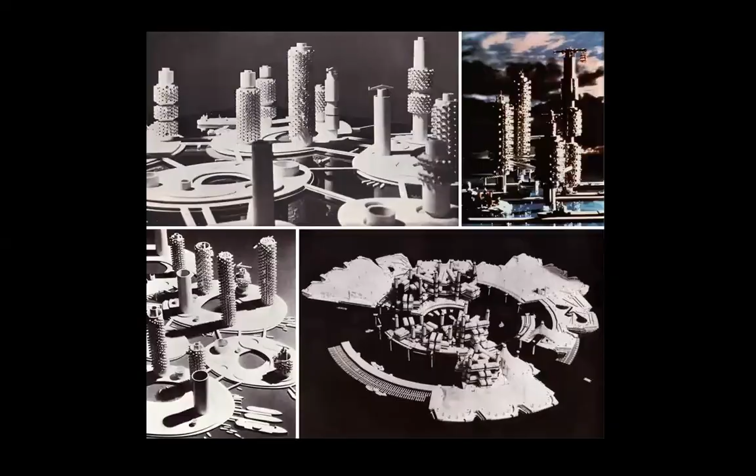Anyway, Metabolist, Kiyonori Kikutake's Marine City, 1968. It was a heroic effort on the part of Japan to transcend the tragic effects of the Second World War. And this country was able in less than 20 years to become one of the most powerful economies in the world, and culturally also immensely important. And in architecture, they still have a vigor that most countries do not have. But at that time, it was this heroic dimension of their effort which impresses me the most. It was truly a revenge that post-war Japan tried to achieve on the very sad, and maybe the word sad is not strong enough, of what happened in the Second World War, if we are to mention just the bombings of Hiroshima and Nagasaki.

So technology, yes, but it's not just technology, because here we are dealing with Japan, and Japan has a very deep, deeply rooted culture in myth, in their systems of faith, and a great connection with nature. And this intermingling between deep affection for nature and an incredible devotion to technology, as sophisticated as possible, created the background on which Japan achieved what it achieved, and it continues to achieve.

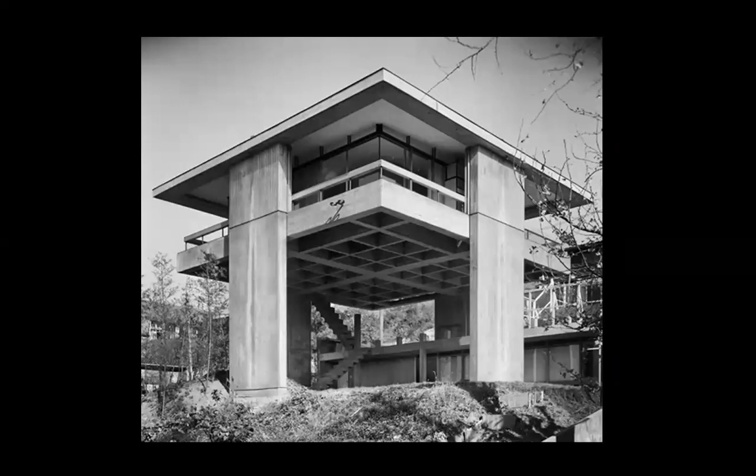The Sky House from 1958, his own house, actually. So 1958. Oh, this was 65 years ago. What can we say? It's a house maybe that doesn't impress us incredibly, but when you consider it was built in 1958, and its very name, a sky house, I wonder what Frank Lloyd Wright would have thought about it, because he thought that the house should emerge from the earth and be attached to the earth. And in this case, it's a sky house. Kiyonori Kikutake.

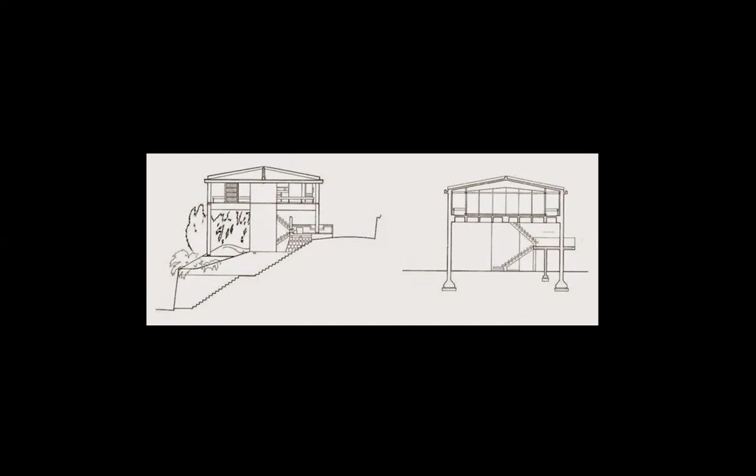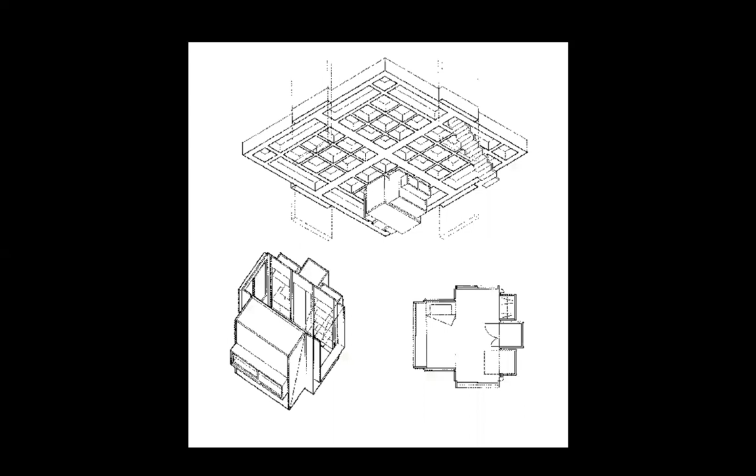But even if it's a sky house, it's in a different sense from, let's say, the anti-gravitational architecture that some architects today advocate. This is not actually anti-gravitational or non-gravitational. In fact, if you look at the section and the side elevation, it is elevated from the Earth, but it's not ignoring gravity. It's coherent, it's clear, it's logical, it's rational, it's not arrogant. It's not an arrogant house that says, I'm going to ignore gravity. No, but for some reason he thought of elevating it above the earth the way he does.

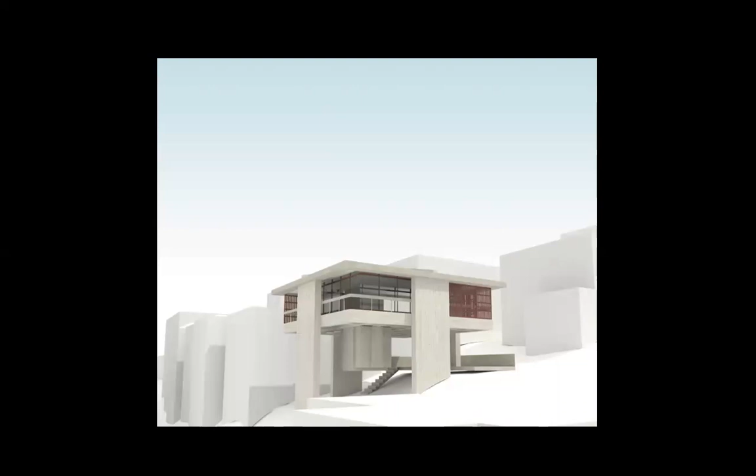You can see his own house because there is a large picture of his utopian, if we are to call them so, utopian studies. The Sky House, Kiyonori Kikutake. Even Rem Koolhaas visited him in this house, and we are going to see some pictures later on with Koolhaas talking to Kikutake inside this house, the Sky House.

From the time of its being built and what this picture depicts, you can see large buildings continue to be built. So now the house is surrounded by massive constructions. A large, unique space.

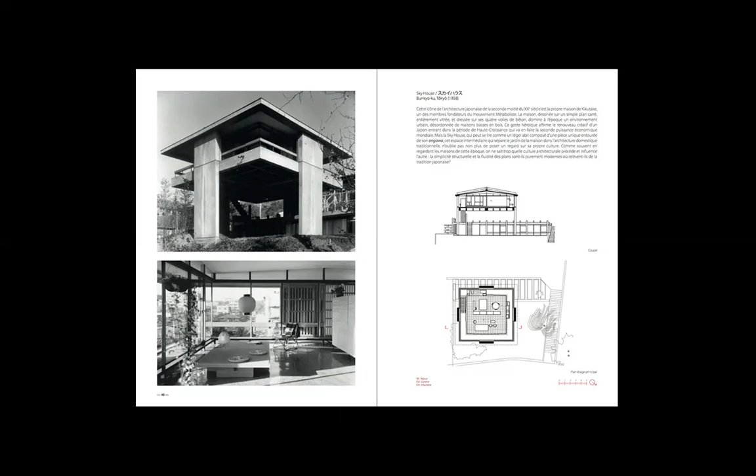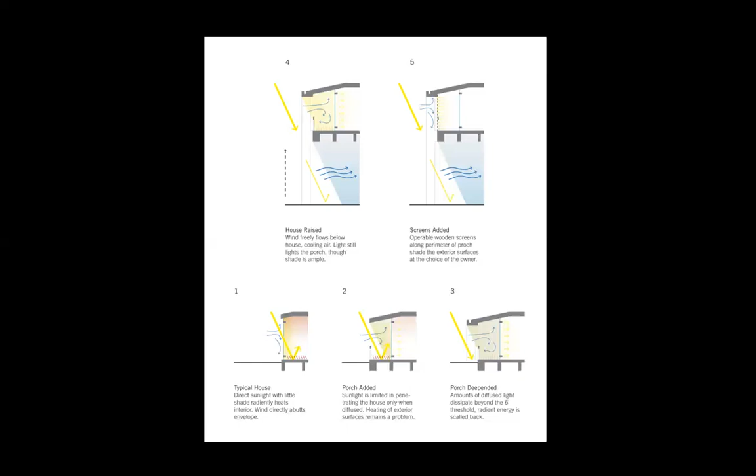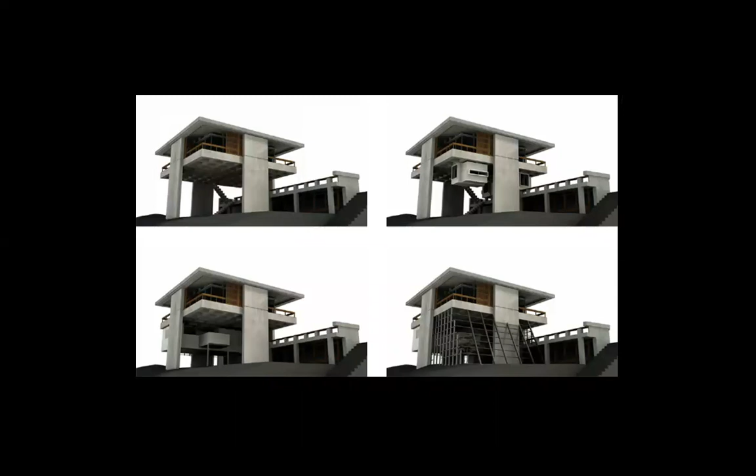Now a temple ossuary, 1965. A very interesting building, actually, with this concrete covering, maybe oppressive somehow, but considering the function of the building, I think it's a very powerful statement. You have this floating cap, this floating covering of concrete that doesn't reach the earth. I wonder what Kikutake thought of when he did this. It is clearly a meditation on the finality of life, on death.

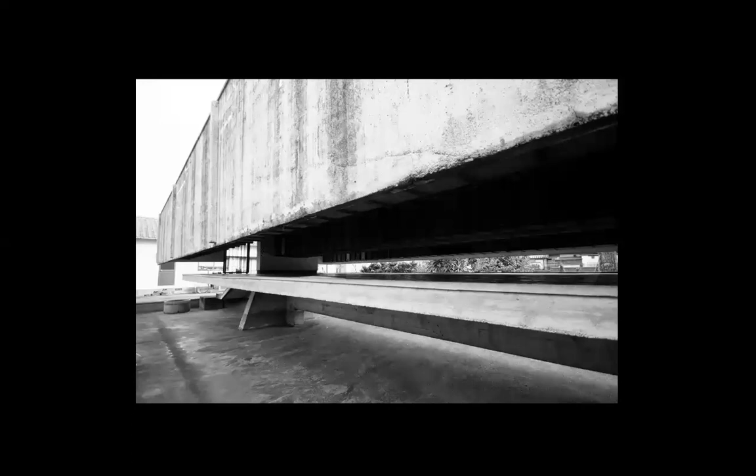This reminds me also a little bit of that memorial by Giuseppe Perugini built in Italy, which also has this heavy slab above where the memorializing graves or gravestones were placed. Interesting comparison between Perugini and Kikutake.

A hotel now, a mundane function after the ossuary, but here we see the influence of, I mean, most people who would look at this image would say this is in Japan. And maybe not just because of the landscape, because of the gardening, but also the building, the silhouette of the building. These architects are very forward-looking, very modern, but also rooted in what we call tradition. And the building is able to evoke somehow the meeting between the two, at least in the previous picture, this one as well.

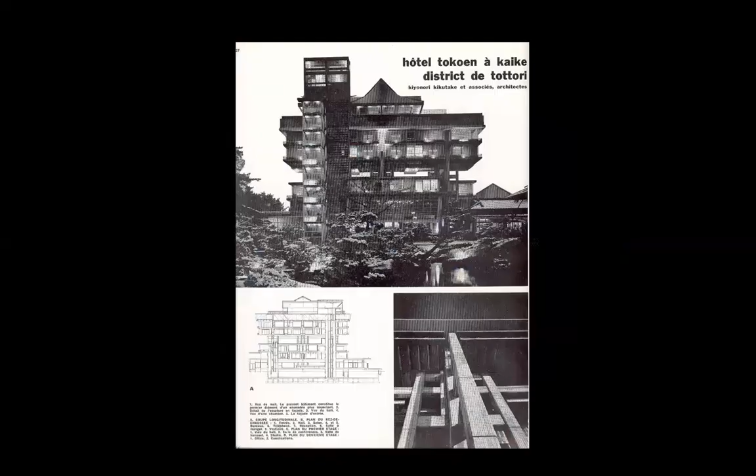Now, they used a lot of concrete, these Japanese architects. I read that at one point, Japan was the country that was using the most concrete in the world. Now it's probably China, but at that time, there wasn't a grave concern with pollution as it is now. Now, I would be more reticent to use so much concrete, but at that time, they tried to escape the ashes of the Second World War, and concrete helped. It also helped to evoke the heroic stance of the Japanese people. So this is a hotel by Kiyonori Kikutake.

And again, the gardening of the Japanese is so delicate and subtle and complex and lyrical. It shows the affection that Japan has for nature, a deeply felt affection. Even when they build with a lot of concrete, they never leave the space around the building a no man's land. They take care of it.

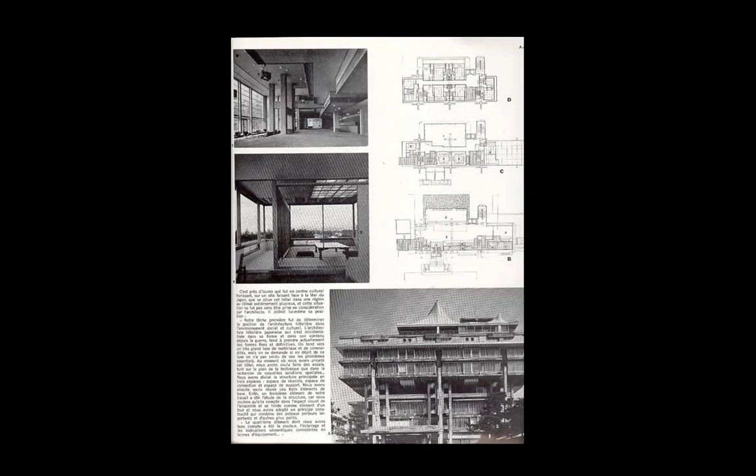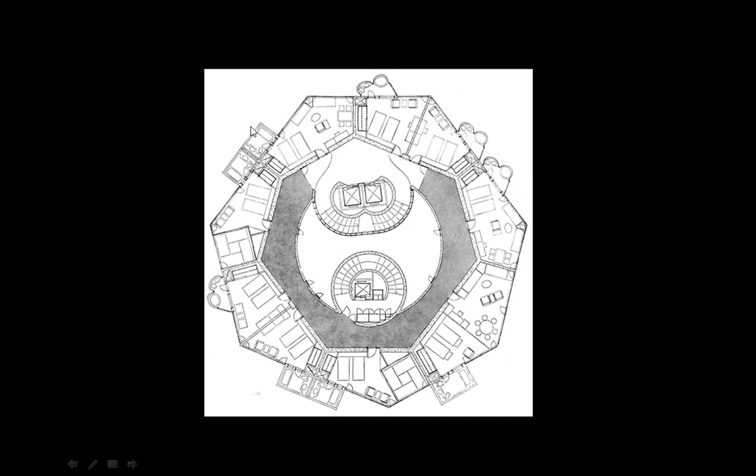Pacific Hotel, another hotel. Interesting how something that is not advised where I am, but the Japanese have no problem doing so, is to place the bathrooms as exterior distinct elements which actually animate the facade, the sides of the building. I mean, the architectural expression of the building would be different if the bathrooms were not externalized in this way.

Practically, the cells of the bathrooms create a dynamic facade, and this is important, very important. And you see the bathrooms are treated differently. They are not all identical. There are like three kinds of bathrooms here: two together, one, then here with a different shape.

This was the future. I don't know if he said it. I included it in the presentation which I prepared a few years ago, or I found these words in an article about him. But it is an intriguing, short statement. This was the future. We can talk about it, maybe on a special occasion with this very title.

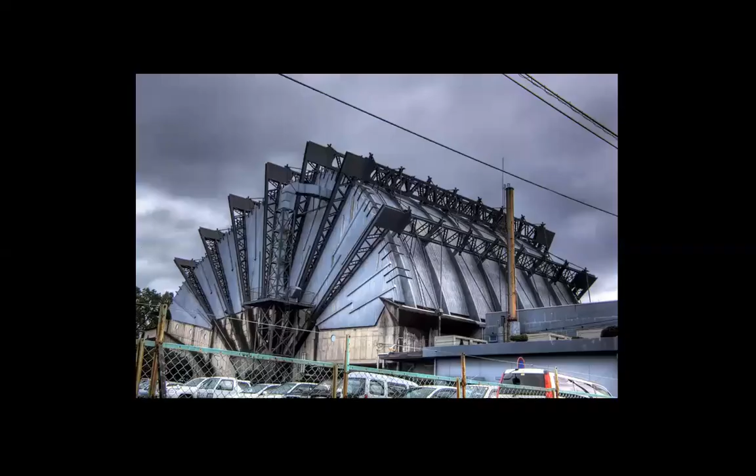This was the future. A civic center, 1966, a very spectacular building, very unexpected for a civic center. Look at this. You know, it's a mechanism or a mechanical organism, structurally intriguing and provocative. If you look at it, you would not say it's a civic center. You would say maybe it's either an industrial building or a gymnasium of some sort. Kiyonori Kikutake.

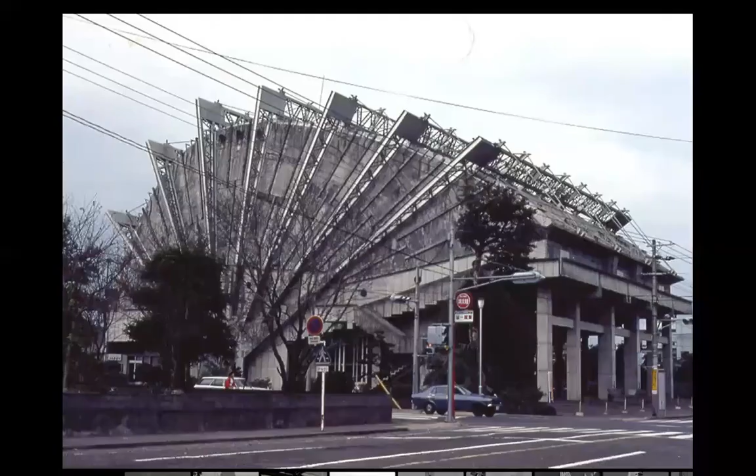This city hall is still very provocative, aesthetically speaking. You are tempted to think that it's like an accordion, a harmonica, that you can squeeze those parts that are diagonal, but it is not so.

It's clear that the metabolic processes of nature are here reinterpreted architecturally, and it's about the bio in architecture. It's a bioarchitecture, abstracted as it should be.

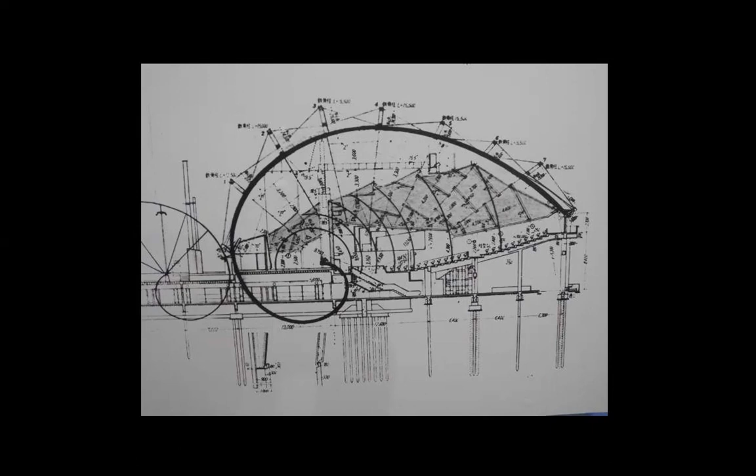Expo Tower, Osaka, 1972. A remarkable tower that he built. But here it says 1972. It should be 1970. He worked together with Kenzo Tange, Arata Isozaki, and other architects, and they created a very spectacular Osaka World Exhibition. Here again, we see technology and geometry and the forces of nature contributing to a certain vision that is associated with what we call metabolism.

Osaka will have again a world exhibition in 2025. Apparently, they are very good at this sort of thing. They even had one, I forgot exactly in what year, around the 1990s, dedicated to gardens. Apparently, a very successful world exhibition as well. This tower is by Kiyonori Kikutake.

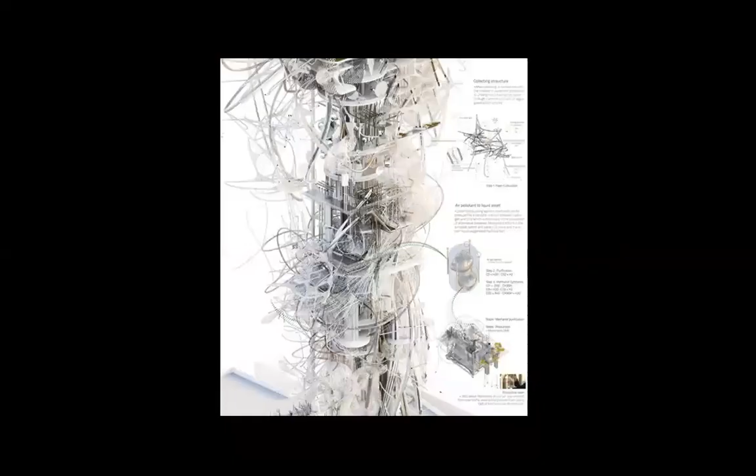I mean, here we arrived, and I find these images very, very provocative. The process would involve extracting the carbon from petrol fumes and using it to produce sustainable biofuel. The project is about a new infrastructure gathering resources from pollutants in the city atmosphere, which could be another valuable commodity in the age of depleting resources, says Chang Yo Li. So visionary projects are still being made, and it's good that it is so. It looks different in many ways from the tower by Kikutake, but somehow I think it expresses our time.

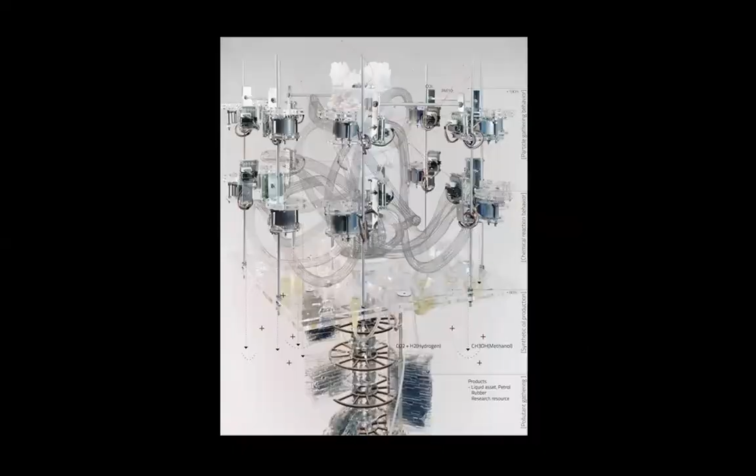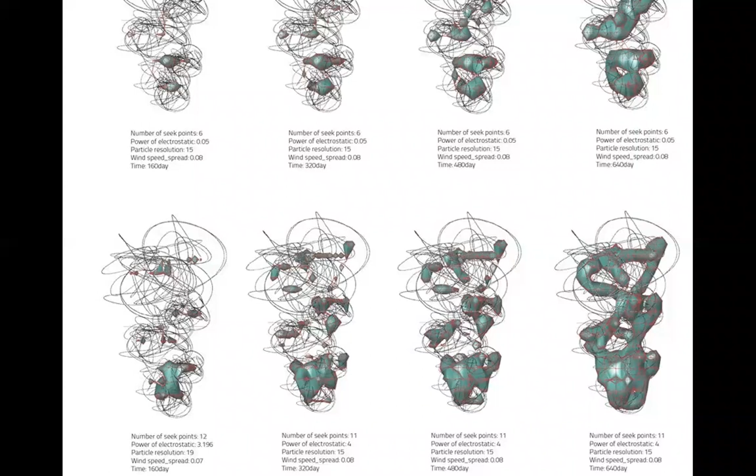Referencing a quote from architect Buckminster Fuller, Lee says, pollution is nothing but the resources we are not harvesting. We allow them to disperse because we've been ignorant of their value. He adds, pollution could be another economy. Well, wishful thinking. Anyway, he worked hard for this. It's a diploma project from the architecture program at the Royal College of Art in London. And he was one of the two winners of the Sheppard Robson Student Prize for Architecture at the Royal Academy of Arts Summer Exhibition. And here are some other images of his project.

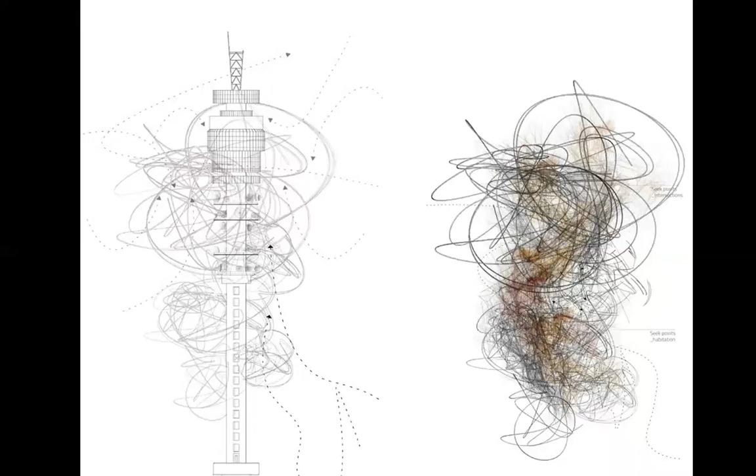He also doesn't say no to chaos and architectural entanglements. As such, I think he is very up to date. I mean, rationalism is not sustainable any longer. Reason is necessary, but not rationalism in the narrow sense of the word.

Between 1968 and 1983, Kikutake produced numerous projects for floating cities with evocative names such as Marine City and Ocean City. In 1975, he finally got to build a real one. Aquapolis was a 10,000 square meter floating city, a crossover between an aircraft carrier and an oil rig. It formed the centerpiece of the Okinawa Ocean Expo. Aquapolis, built by Kikutake in 1975. Here it is.

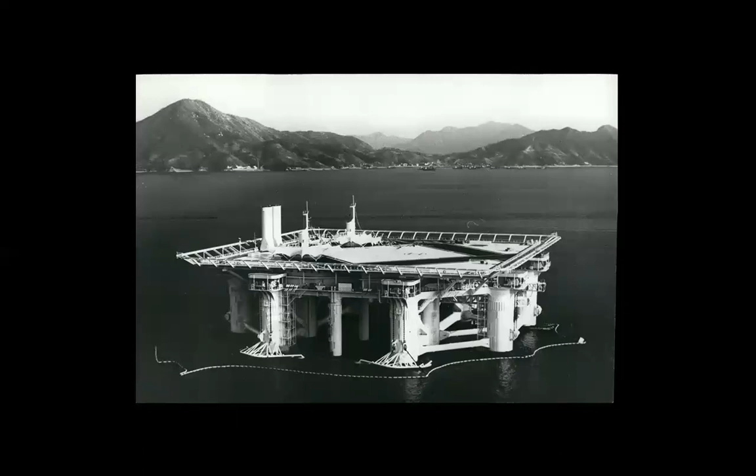I'm not sure this is what our oceans and seas need, but at that time there was more optimism relating to the activity of human beings on this earth than today. Although today there are many projects, some built in the same spirit, and we are going to see one a little bit later, built by Diller and Scofidio, inspired, I'm sure, by this project, and also by the pavilion that Pepsi Cola built in Osaka.

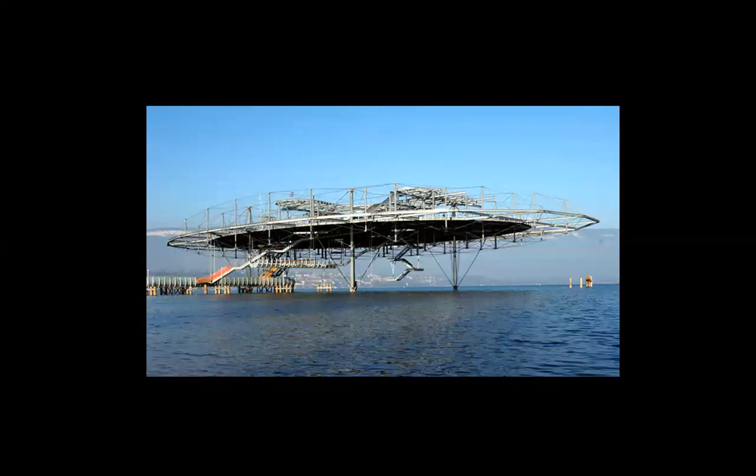Unfortunately, I'm not so sure the idea of building a blur building in Switzerland by Diller and Scofidio was very original, but it looks striking. So this is what Diller and Scofidio did. You saw what Kikutake did, no? And then we see Diller and Scofidio here in Switzerland on a lake. There's a lot to say about this.

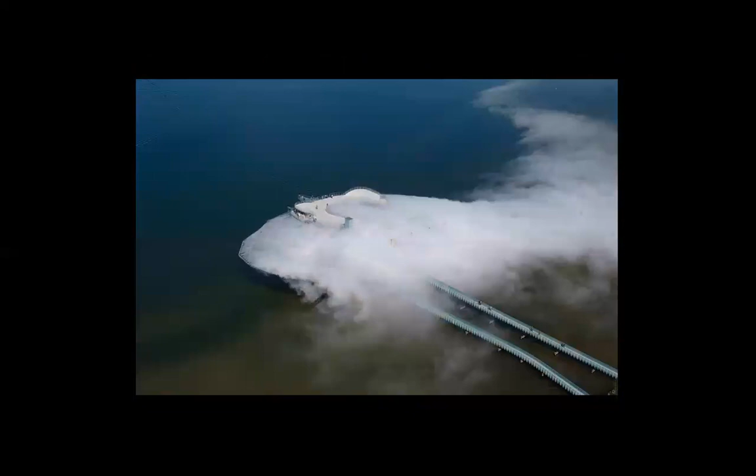Which is a dignified architecture, robust yet sensitive, asserting yet modest. This is what sustains these Japanese architects, even when they are very forward-looking and extremely dedicated to the highest technology. They have the support. They are grounded in that cultural and spiritual past, which they never ignored. And this gives them legitimacy and force. They are grounded.

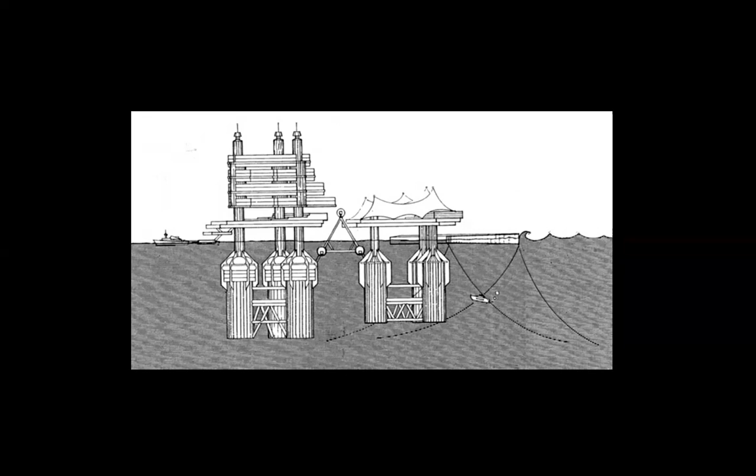Marine City, Hawaii, 1971 — another attempt to extend humankind on water. Utopian projects, if we are to call them so, but utopia could be realized, with some corrections maybe.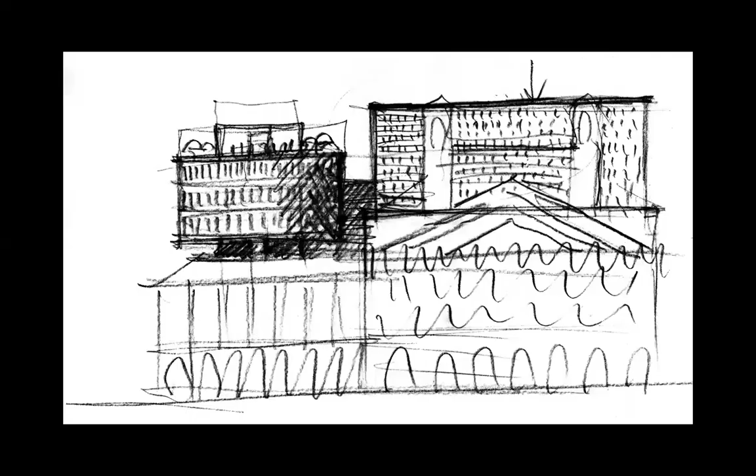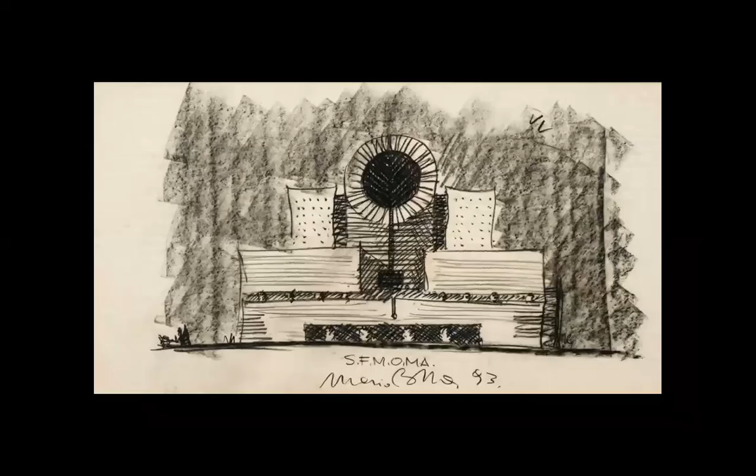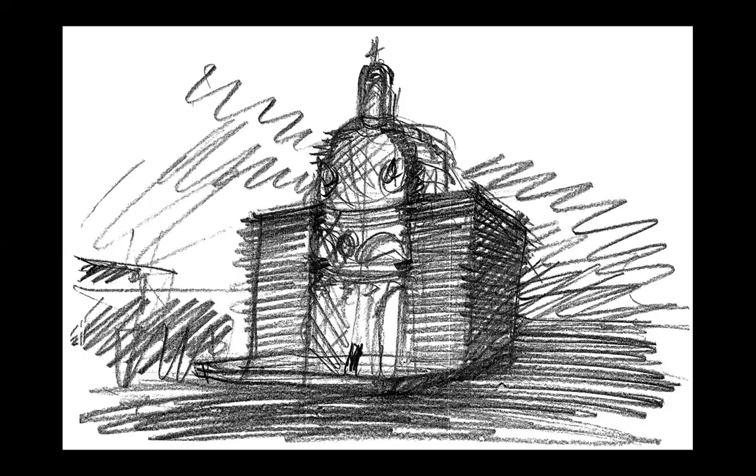Some drawings — in the hurry to prepare this material, I didn't include his early drawings. I think he was drawing better when he was young than when he became older, maybe because he became tired of his own success. The drawings he did later, like this one, are rather quick sketches, and I personally don't find them very attractive graphically, but that's how I start a presentation, by showing also the drawings of the architect I am talking about. I included these drawings, but these are drawings done later in his life. When he was young, he was influenced a lot by Louis Kahn.

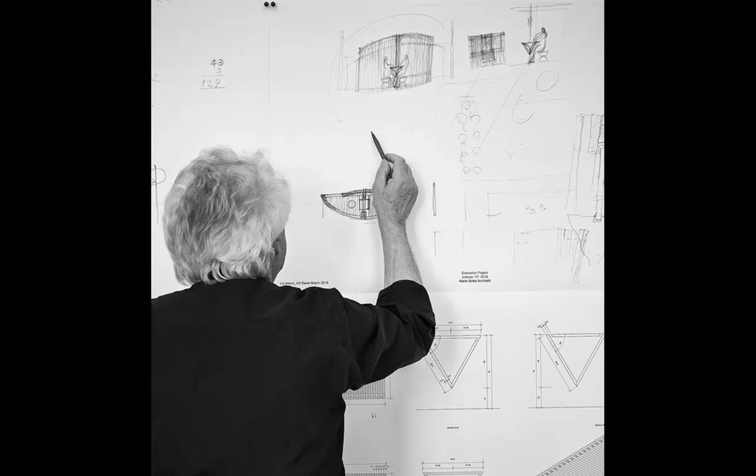Here he is drawing on some paper on the wall. He loves to draw and draws manually, although in Mendrisio, the school founded by him, they study digital technologies very early on, from the first year — and it's not optional, you have to do it.

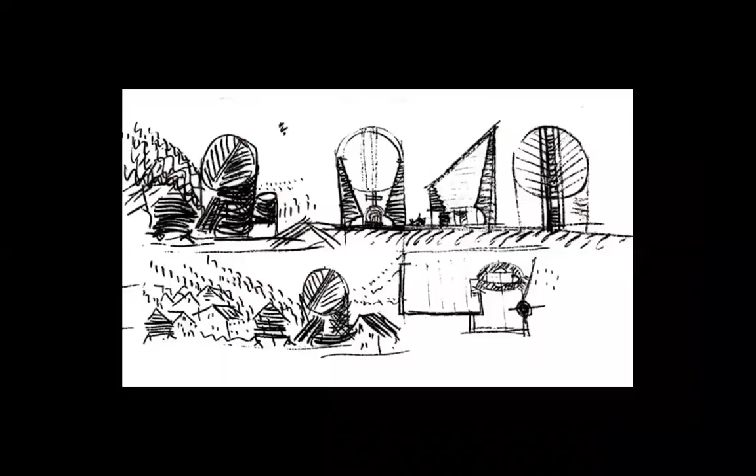Here he is drawing a chair that he actually built. Unfortunately, in this presentation, I do not show his furniture designs and other sketches. We are going to see this building later on.

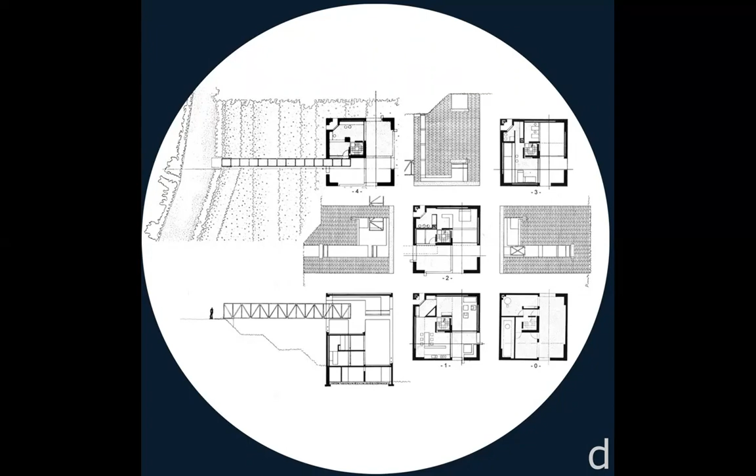The landscape is magnificent. The architecture is very clearly defined, but because of the large openings in the walls it connects with the outside. It could have been very alien in the landscape, but because of those large erosions, if I am to call them so, the prism is receiving and giving, is participating in what we call the environment. Also the unusual aspect that you enter the house at the top, not at the bottom. This also creates something distinct.

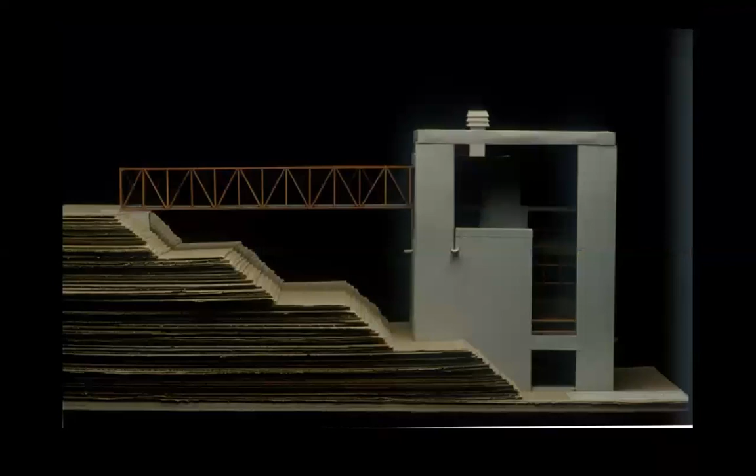Some echoes on the right, a little bit from Carlo Scarpa, his professor or tutor at the University of Architecture in Venice.

At that time, he had a fresh vision, and his buildings were expressing this vision appropriately. But later on, I think sometimes he became a little bit the prisoner of his own maniera.

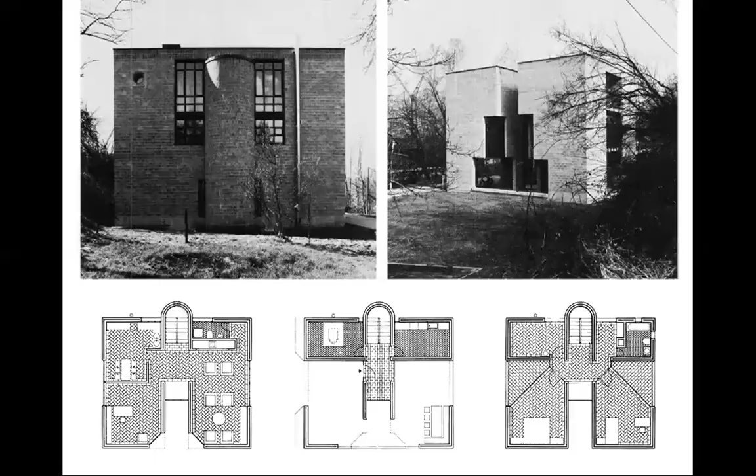Sampietro House, 1979. Very often he has a solid which he cuts in half, so you can see the two parts that were disassociated, like here. It's a rift between two parts, but there is also the whole, which is the cube, almost the cube. This became a signature, a trademark for Mario Botta, a little bit tiring at times.

He was very influenced by Louis Kahn, but I think Louis Kahn is a superior architect, although Mario Botta has some remarkable achievements, and we are going to see some of them.

I would think what differentiates Louis Kahn from Mario Botta is that, well, on one hand one was the teacher and the other the student, so to speak, but more than this, I think Mario Botta, despite the fact that he is very interested in what is called the sacred, does have a rather high level of the mundane in his work.

This could be problematic sometimes, but he did build some very convincing structures for religion, for spirit, for the sacred. Maybe he even thought of doing his villas somehow not necessarily inspired by Villa Rotonda of Palladio, although he has one himself called Rotonda, and we are going to see it. But the idealism of that kind of architecture seems to animate him. Not too many architects at that time, and even today, or especially today, have a similar idealism.

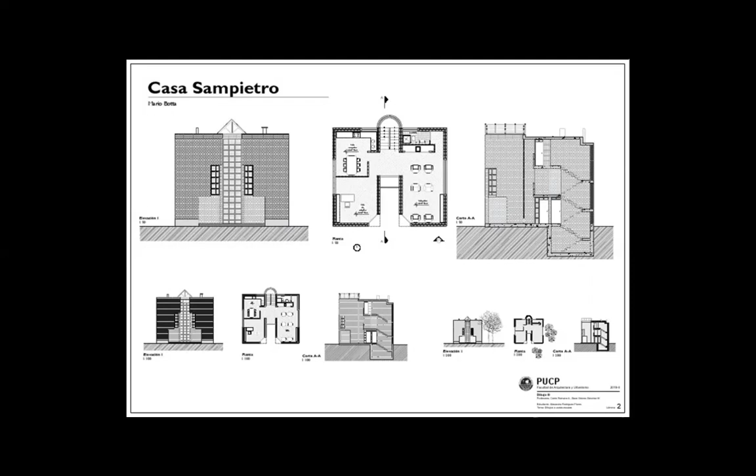Anyway, as compared to the other buildings that surround this building by Mario Botta, his building does have an architect. The others, we are not sure. But in this case, we say yes, it's the will of the architect. Maybe sometimes the will of the architect is too obvious. We see on the elevation, upper left, and even here, maybe because they became so well known, these buildings by him don't surprise any longer. They are a little bit facile. They became icons, and they don't generate, in my opinion, great surprise any longer. This is how the building looks from the back.

Sorry again for the small resolution picture. And now Casa Rotonda, 1982. That was the year when the postmodern Venice Biennale took place under the directorship of Paolo Portoghesi, but still the architecture of Mario Botta at that time was intriguing, was powerful, was iconic.

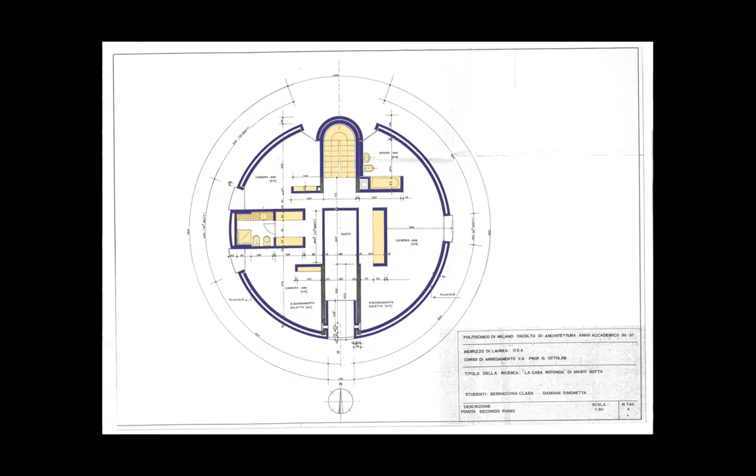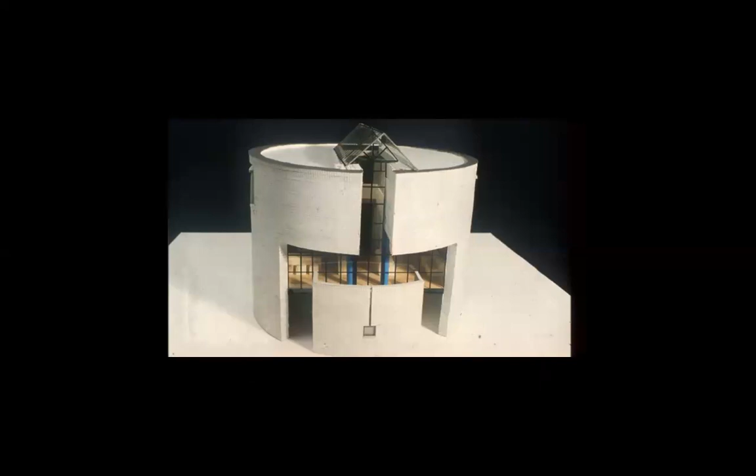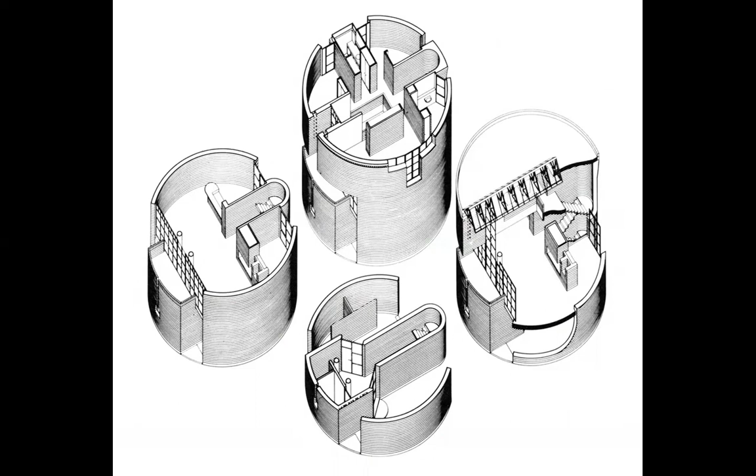But Mario Botta never left the solidity of what he believed in for the seductions, sometimes violently so, or sometimes mimicked in a seductive way, of deconstruction. And nor was his postmodernism highly nostalgic, in the sense that he didn't borrow stylistic elements from history. So I wouldn't say that his buildings are historicist. They are not.

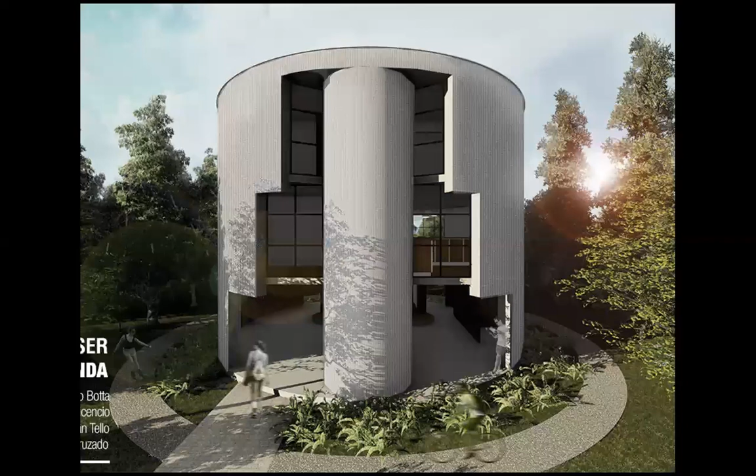But there is a connection with postmodernism, and that's why there are articles about him, where some of his buildings are placed within the context of what we call postmodernism. It's not that postmodernism of nostalgia that animated many disenchanted souls at the end of the 20th century. No, he still believed in an abstraction, in a strong geometry, and he didn't employ borrowed columns from I don't know what era and so on.

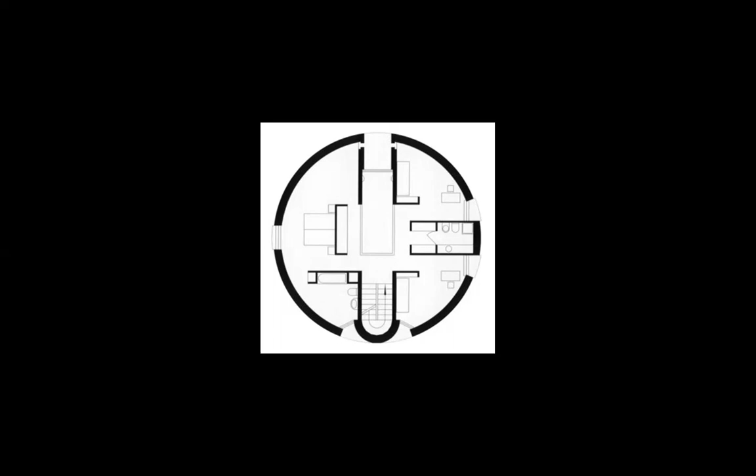In my opinion, it's a little bit regrettable that the staircase externalizes itself in this way, rather convenient and a little bit predictably. It could have done more, but I think, considering the purity of the cylinder.

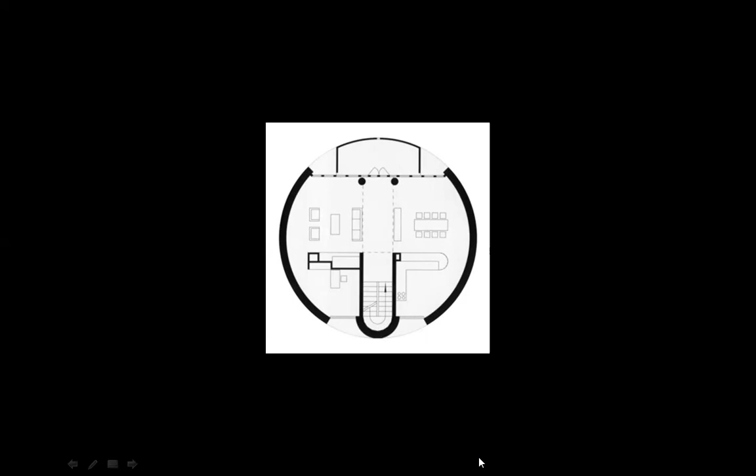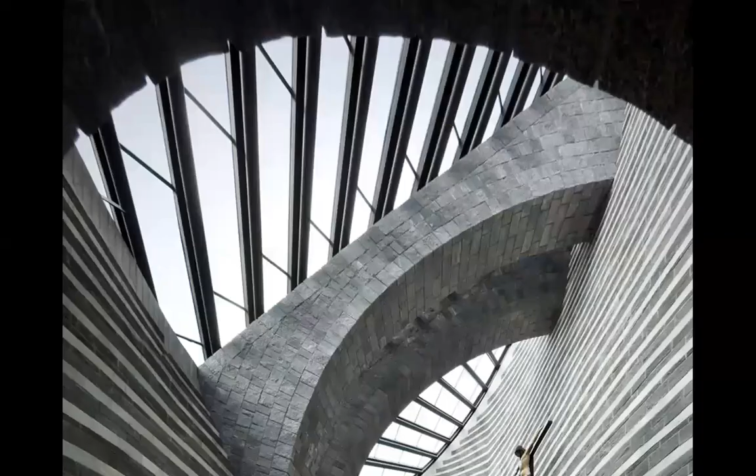The church San Giovanni Battista Mogno in Switzerland, 1996. We saw some drawings of it. Now we see the building. There is heavy masonry here. Some people would say that it's too heavy for our time, but who knows? Who knows? Maybe not. But we remember those words between matter and memory. We see both matter and memory. We also see ornament. He's not afraid to bring sensitivity to his masonry walls through graphic means which are ornamental in nature.

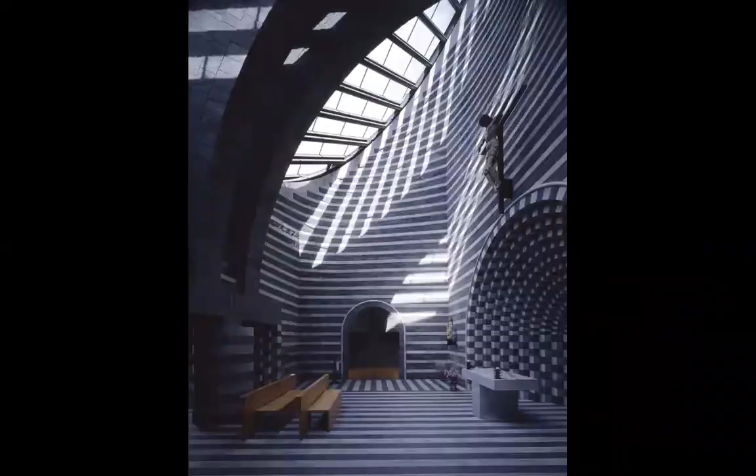He obviously believes in architecture in a way in which maybe not too many of us still do. We are going to see a number of churches built by him because he did build a lot in the field of what he calls the sacred. I would be hesitant a little bit to use this word sacred because, like the word love, if it's too employed, it becomes weaker actually. But to replace it with what? It's a question.

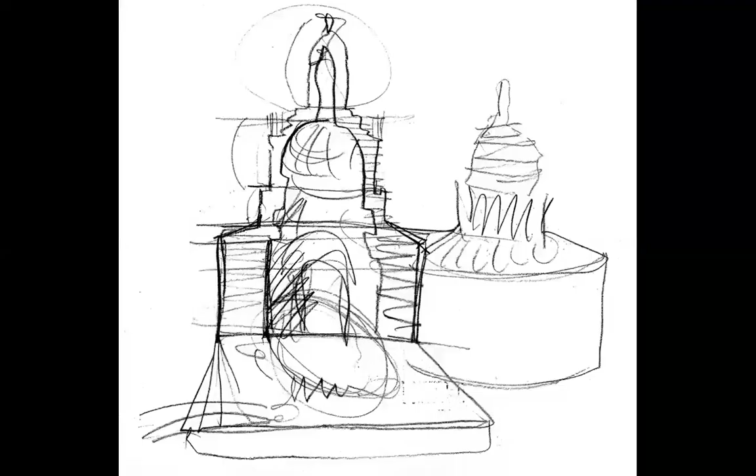But the drawings are probably expressing very intimately the time we are in. The idealism or ideality of Borromini, not to mention Bernini, and that time, you know, are probably difficult to sustain these days. That's why very important architects today draw almost disenchanted drawings, like these sketches by Mario Botta. I wonder what he felt, what he thought when he made these nervous sketches.

This is not how Borromini drew. This is the 20th century or the 21st century, the 20th century. But this was the idea, to cut in half, you know, the interior of the building by Borromini in Rome.

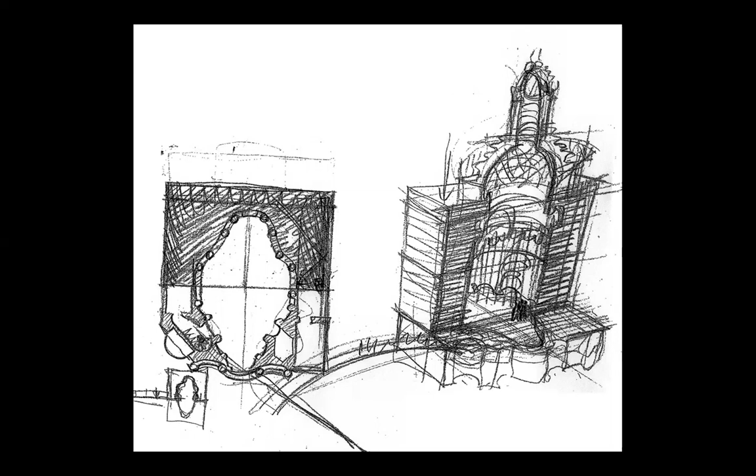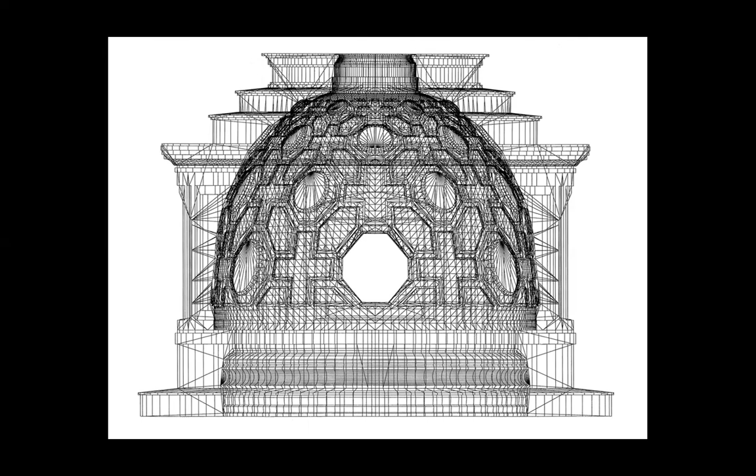And with the help of digital technology, this became feasible, and it was done. And I salute it as a good work. I mean, how else to express your homage towards Borromini? You couldn't compete with him, but in an original way, Mario Botta succeeded in showing both affection and distance somehow.

And in a way, it's a meditation on life itself, because we are all born to die, and we are all accompanied by a shadow, which at the end becomes vertical while we become horizontal. I don't know if I expressed properly what I wanted to say.

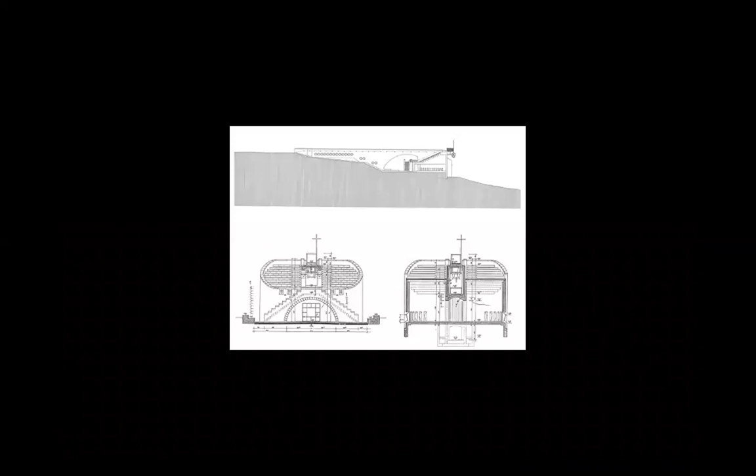I'm unhappy with these images, but as I said, I had no choice. The interior is rather surprising and very courageous, I would say, with its level of abstraction and the presence of blackness and wood. It's an interior which doesn't leave you indifferent.

Nor being on this terrace, I think, leaves you indifferent. It's impossible contemplating those mountains and the sky. Is it a Zarathustrian statement? I don't know. I mean, it is very ample. That stone brought there, it's not really an ecological building. It's not a building which asserts eco values. It's assertive still of man, but a man who cannot live without something higher than him.

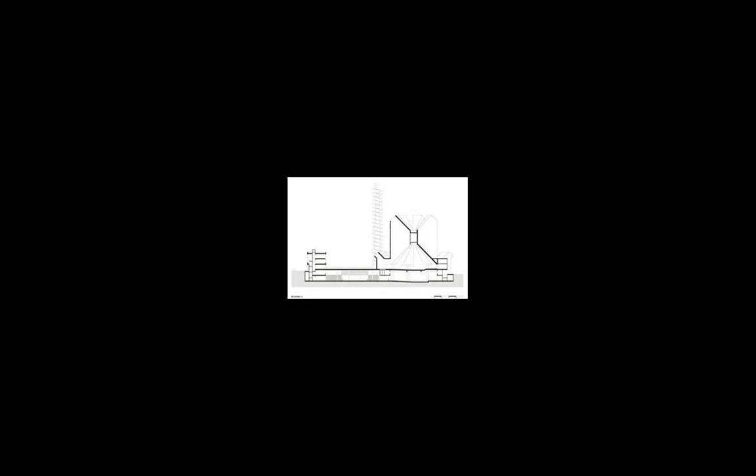Now, a synagogue and the Jewish Heritage Center, Cymbalista Synagogue in Tel Aviv. The Cymbalista Synagogue and Jewish Heritage Center is a cultural center and the main synagogue of Tel Aviv University. It was designed in 1996 by Mario Botta and constructed from 1997 to 1998. It has a few echoes, not towards the outside, but if we see the section of the unbuilt synagogue by Louis Kahn in Jerusalem, and there are other echoes from Louis Kahn here.

Again, I'm exasperated by these drawings, and I couldn't solve this problem. Particularly, this section makes me think of the synagogue project done by Louis Kahn for Jerusalem, which was not built, unfortunately. I think one day someone has to build that building, just as some people built Saint-Pierre de Firminy Vert by Le Corbusier after he died.

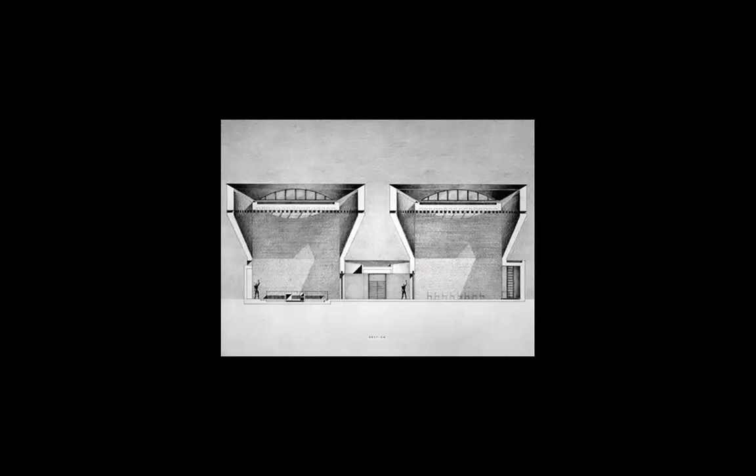Now, what is that silhouette? I don't know if he did this drawing or his office, but I wonder why he used the paradigmatic Le Corbusier's little man, little but muscular, in these sections. I'm not sure it was needed. Anyway, maybe they are not his drawings or his office's.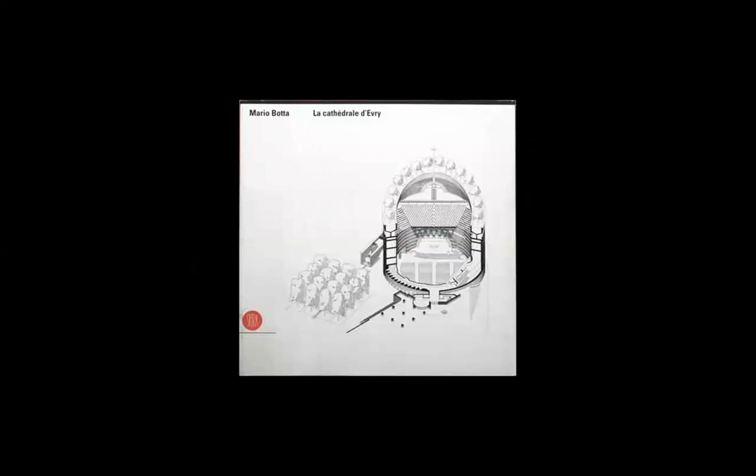Évry Cathedral in France, a large building, yes, it's a cathedral with an unusual crown of trees at the top. Here again, we see some echoes of a staircase done by Louis Kahn for the Yale Art Gallery, but at a much larger scale. Hard to see this. Sorry, I'm referring to this, but it looks like it's not a circle. It's an ellipse, but maybe it is a circle. I couldn't understand from this drawing.

But echoes from Louis Kahn are all very obvious. But less obvious is what we see outside. And yes, this, I don't know, at first I didn't like it, this crown of trees, but I don't know. I still have to think about it. It's an architecture that I think in many of his works, even those dedicated to what we call the sacred, Mario Botta couldn't quite get rid of some touches of the mundane somehow. I have the feeling.

Or maybe I should say it's about the graphic aspect of his architecture, which is present. He's working with tectonics, he's convincing using bricks and stones, but sometimes he's not sufficiently surprising. For example, I think that Sigurd Lewerentz in Sweden is more surprising with a much more modest building where he employs bricks in very poetical ways.

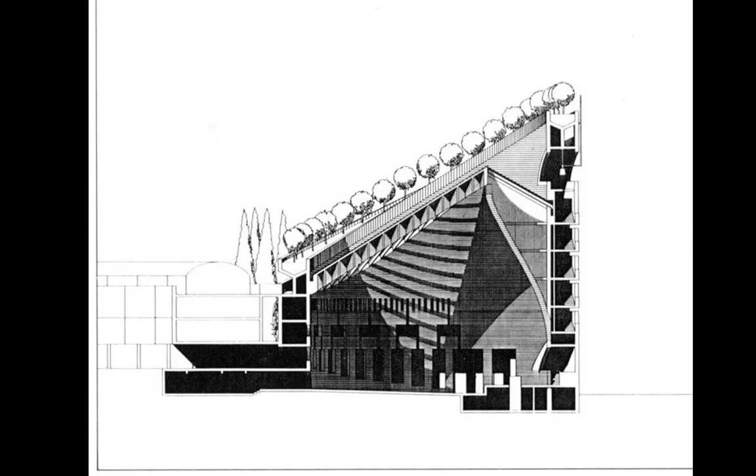Again, we see the employment of brick, not neglecting ornament. And now the Watari, a museum in Japan. I wanted to include also a building that is neither a house nor a church, and it is in Japan. It's a museum of contemporary art in Tokyo. And I think somehow he was able to remain himself and also evoke somehow Japan.

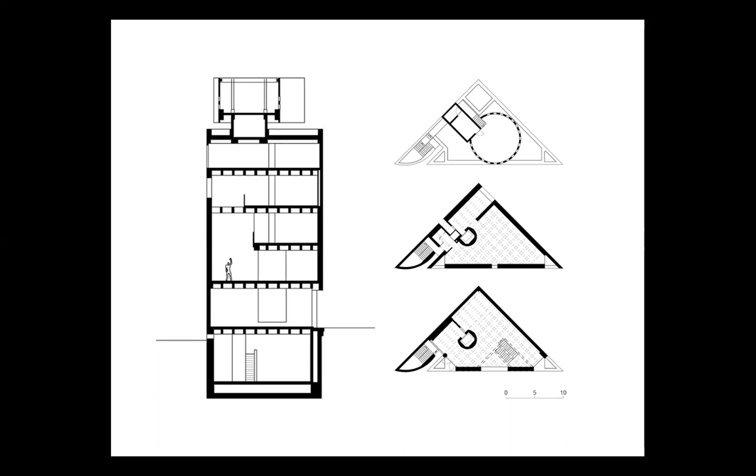I think he did a good job at avoiding using his paradigmatic brick aesthetics, red brick. And here we have, it's still a Mario Botta building, but adapted to the Japanese context, to Tokyo. And yes, this facade is a little bit predictable because we already talked about it. Here you have the rift between the left side and the right side. It's a trademark, or it's a signature element in his architecture. But somehow he honored the context, the Japanese context, Tokyo, appropriately.

Now, maybe that banner there looks a little bit strange, but maybe that's exactly what the building needed in order to escape maybe the excesses of something too solemn, maybe.

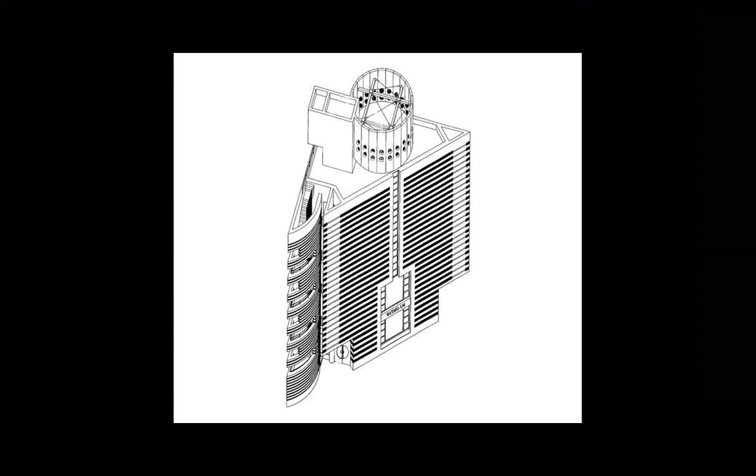Okay, and now a work in Austria, which puzzled me, because for someone who is truly concerned about spirituality and about what he himself calls often the sacred, this building is too acrobatic and, in a way, simplistically acrobatic. And I don't think spirit truly needs something like this. Like if I compare this with a very modest chapel that Lina Bo Bardi built in Brazil, here I see, yes, an acrobatic architecture that is a little bit too showy, in my opinion.

I mean, does spirit need this rotation of the cube? This exhibitionism, this extravagant gesture? I don't think it does. But that's what he thought of doing, and that's what he did. I personally do not think spirit needs something like this.

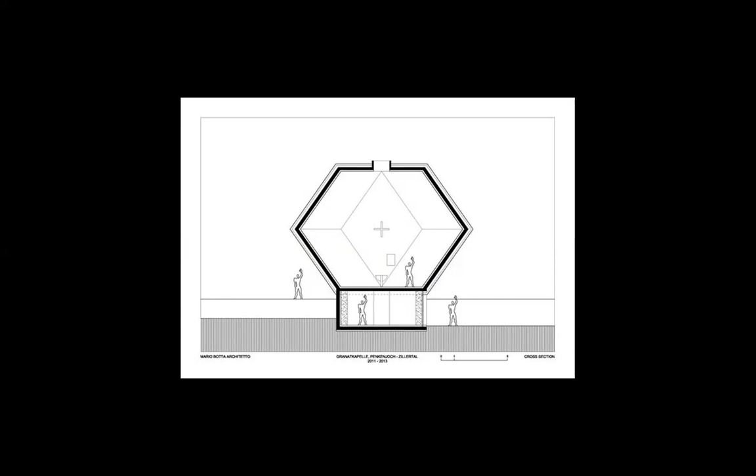Anyway, he's still very capable of creating these geometries; with simple means he is able to create sometimes unexpected results. The drawing also shows some anxiety, I would say. If I am to psychoanalyze the drawing, where the stairs are, I see some nervousness there.

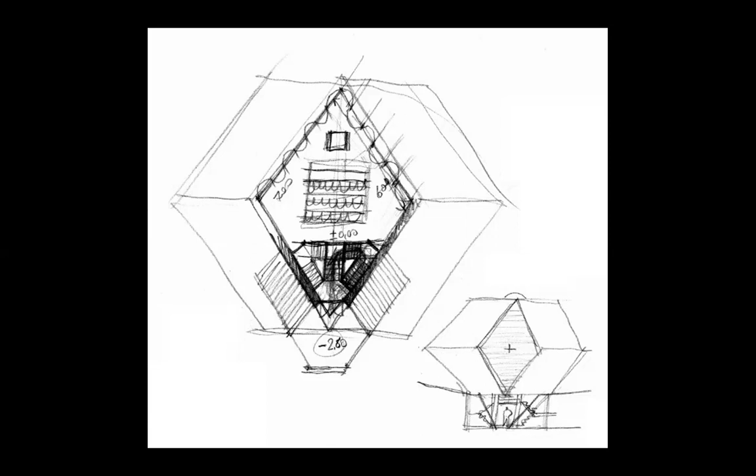And now, in order to puzzle you, in as much as I was puzzled, here we have a casino built by this architect who is dedicated to the sacred. Now, what does the casino have to do with God, with faith, with spirit? It's the very opposite, no? But you are going to see a casino which, I mean, we know it is a casino, but if it was named a cathedral, we would have believed it.